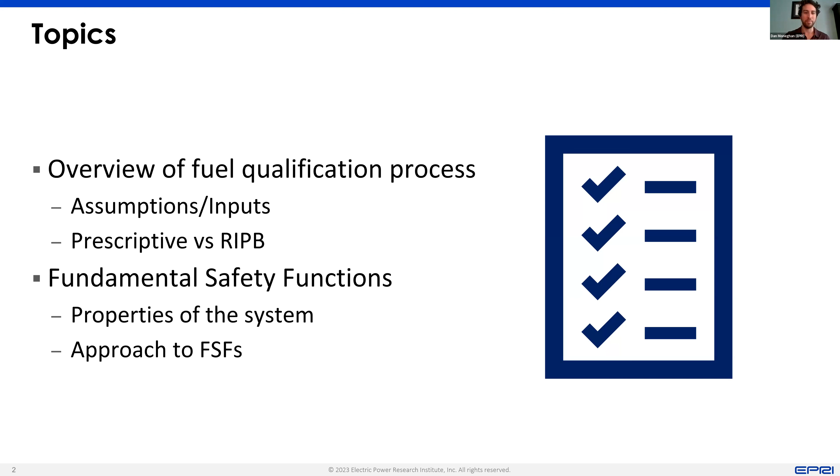So let's get started. The first thing I want to briefly touch on is what the fundamental safety functions are, because this is going to come up in a few different ways as we go through the fuel qualification process. Your fuel and the systems that it is involved with and entangled with are really going to have to do three things. They're going to have to limit the release of radiologic material to the public. The ultimate safety objective is to keep the public safe while we generate energy.

They have to remove heat from the reactor and wastes. We need to make sure that as we're operating these heat generating power plants, that we are adequately matching the heat generation and keeping any sort of accident from occurring that could release radiologic material.

And then we want to be able to control reactivity. And this is really just making sure we can adjust and modulate the heat generation term such that we can adequately remove heat, such that we can adequately limit the release of radiologic material. So these are all interrelated safety functions. And now let's jump into fuel qualification with these three goals in mind.

This is a graphic copied from NUREG-2246, which basically steps you through the different things that you need to consider and achieve in order to get to that very top left corner, G, fuel is qualified for use. We're not going to talk about everything in this, and I'm really only going to hit a few points at a high level. But for your reference, this is the figure that's going to be sort of in the background that we're stepping through. We're going to go from the right really to the left, because that's how you get from the data and modeling assumptions all the way to the point where you have a fuel that is considered acceptable for use in a reactor.

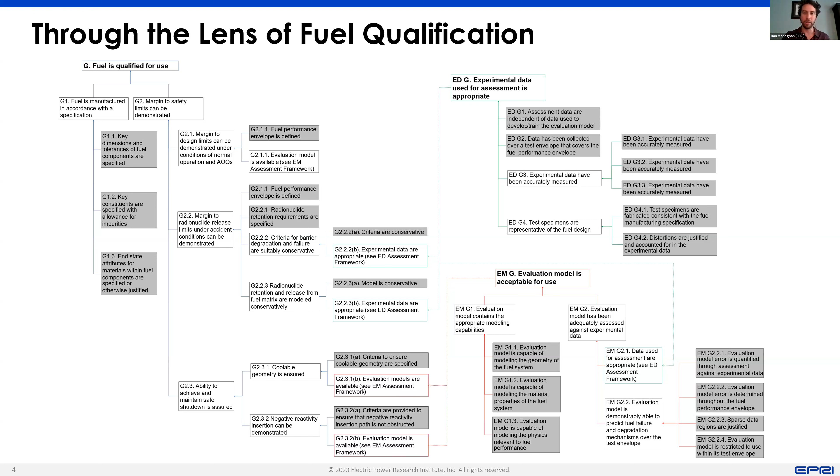So let's call those two out. The two assumptions that we're going to make in this discussion are about what the inputs to our process are. Now, in reality, there's a lot of work that's going to go into making sure that you are developing experiments that get you the data you need in the form you need with the uncertainties you want, of the pedigree you want. And there's a lot of ties between how you use that data to build a model that you then validate, because you're going to need both the data and the models to really be able to progress this process. We don't have time to go through every single possible experiment you could use to really develop all of this, and we're not going to try because that's not really where the value lies.

But one thing that I want to point out is what typical experiments are done. Oftentimes, when you're trying to qualify fuel, what you're really trying to do is show how the fuel changes throughout the operation of a reactor system. In general, this means that you would expose the fuel element to a sustained or semi-sustained level of heat or a specific temperature, generally the operating temperature of the reactor, and a certain amount of neutrons. You're going to put it in an environment that is representative of the irradiation conditions in the reactor so that you can see how the fuel changes.

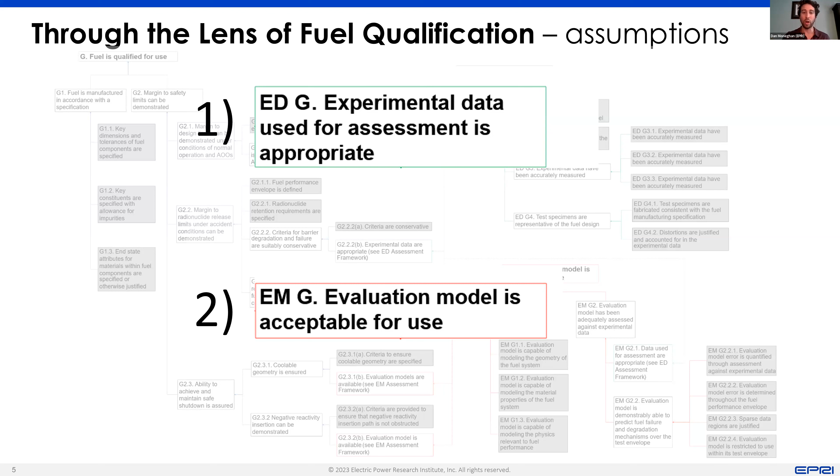But let's take those assumptions and walk through the process and see how a prescriptive versus a risk-informed performance-based approach may vary at different steps in this fuel qualification process. So starting from the data, we use that data to show that there are conservatively defined barrier degradation criteria and radionuclide retention. Now, these barriers can be any number of things.

They can be actual physical structures. They can be feedback control mechanisms. They can be systems or subsystems. There's a lot of different things that could be a barrier here. But for the most part, let's look at these from the perspective of solid barriers because, again, time constrained and we're simplifying a little bit here.

Now, if you think about the solid barriers that are going to exist, that are really trying to keep this system together, they can degrade a bunch of different ways. There are thermal stresses, there are corrosivity effects, there are erosivity effects, there are radiation impacts. Now, radionuclide retention works in a few different ways.

In a liquid-fueled system, many of those radionuclides are going to be soluble. They're going to be suspended or dissolved in that fluid. They'll be in entrained particles. They'll be sitting in this flow somewhere. But those aren't the only kinds of things we'll have. There's also, in addition to solid particulate fission products, fission product gases that evolve through operation.

And while there's a certain solubility level of these in most of these fluids, they can still eventually bubble out and come out of solution. So there's going to be some sort of a gas gap over top that's going to have a different profile of those radionuclides.

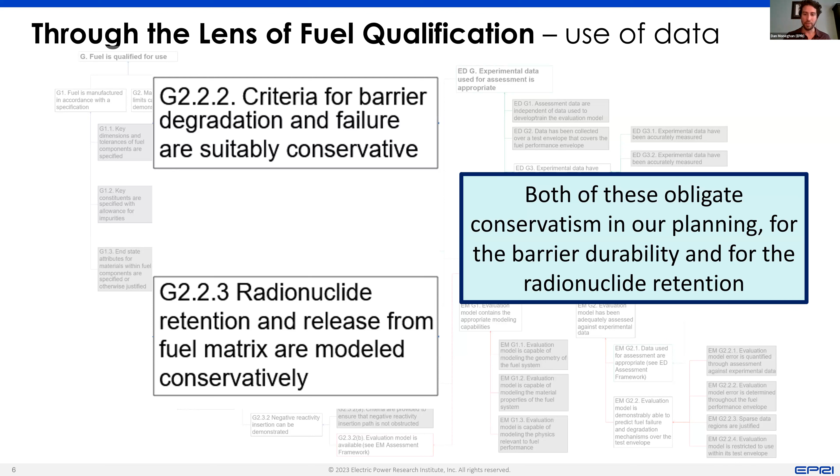That conservatism really trickles up into margin, because you need to define what the margin to your radionuclide release is under a variety of different accident sequences and conditions. And this is important to be able to get to that first of those fundamental safety functions. We need to protect the public. We need to limit the release of radionuclides.

As you're defining these barriers, again, if you do it prescriptively, that margin is going to be built in. That's going to sort of be defined based on whatever occurred in the data when the regulation was developed. If you do this in a risk-informed, performance-based way, well, there's even potentially some further benefits to just having sort of local conservatism and local margins. Because in a liquid-fueled system, an accident sequence can evolve that doesn't necessarily work in the same way as it would in a traditional nuclear reactor or a traditional solid-fueled system.

There are some quirks, as there are with every reactor design, to a liquid-fueled system. In the case of a liquid salt, for instance, there can be an overcooling accident sequence. If you get your temperatures down too much, or you remove too much heat, or something goes wrong, you can solidify your whole primary system. And that's not an accident sequence that is remotely achievable in, let's say, a pressurized water reactor. So the fact that you have these more flexible and sometimes quirky accident sequences that you want to consider means that the barriers that are impacted by these accident sequences may be different in different circumstances.

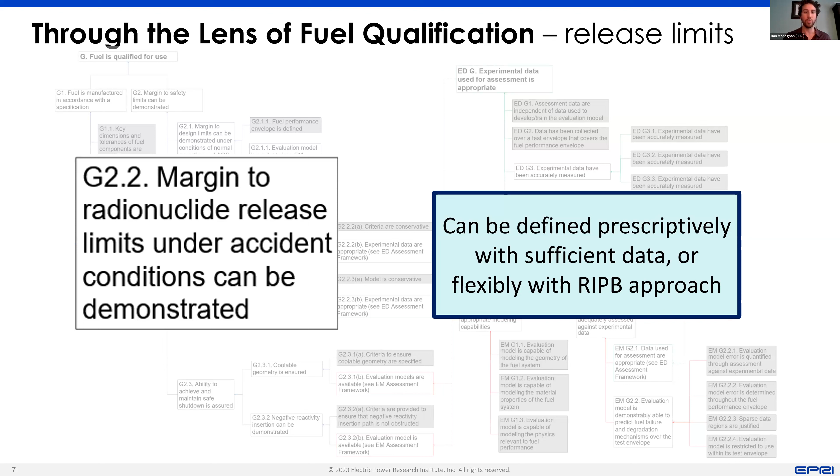So let's step back to another assumption. Let's go with our models this time. What is the model trying to do here? Well, the model needs to show that you can ensure a coolable geometry and that you can demonstrate the insertion of negative reactivity. Now, that first one is a bit questionable. How do we ensure coolable geometry in a fuel where the geometry is a sloshy Newtonian fluid? We pump it. Is having a pumpable fluid geometry? Are we ensuring the geometry that way? Well, I'm not sure. That kind of depends on who's listening to this discussion.

But what I could tell you is that for a liquid fuel, you can ensure that the heat generated by the fissioning and the decay of fission products is able to be extracted based on the characteristics of the primary system. So that we could do. So if we can't ensure coolable geometry necessarily based on the wording, but we can satisfy the objective that this is pointing to, which allows us to accomplish the fundamental safety function, maybe there isn't a great way to get through this particular step in fuel qualification with a liquid-fueled system. But on the other hand, there is a pretty convenient way, and not necessarily a complicated way, to show that you can do it in a risk-informed, performance-based way, satisfying the performance objectives of the fundamental safety functions.

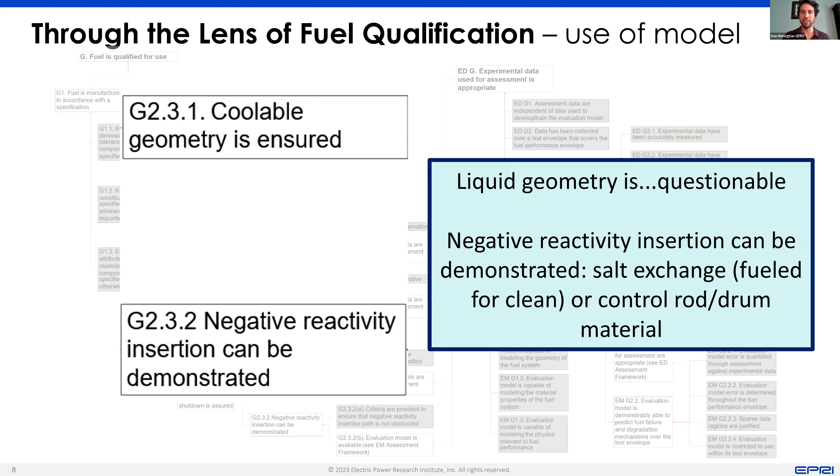Well, what you're trying to do is show that you have the ability to achieve and maintain safe shutdown. Prescriptively, this has a very precise definition. In a prescriptive approach, safe shutdown is when reactivity control systems must maintain a subcritical condition of the core, and residual heat systems must operate to maintain adequate cooling of the core. That's a safe shutdown, according to the NRC.

This is something that is very realistic and reasonable when you're looking at a light water reactor system. But it's a little more difficult and not necessarily the best working definition if we consider a liquid-fueled system. Let's take a molten salt system here, for instance. In a liquid-fueled molten salt reactor, you can have a safe shutdown configuration.

And in this case, safe shutdown is a configuration where there is no possibility of an excursion, really, where you would go to a point where any of the fundamental safety functions are stressed. So you're retaining radionuclides, you are cooling any decay heat or fission heat that exists, and you are showing that there is sufficient reactivity control. There can be configurations like that where there is not necessarily subcriticality maintained in getting to that configuration.

Because of some of the different temperature coefficients of the salt fuel, as you cool down and downpower your reactor, you can come through different criticality oscillations. You can tick back and forth between subcritical and critical, but at no point could you lose control of that system if you approach this correctly.

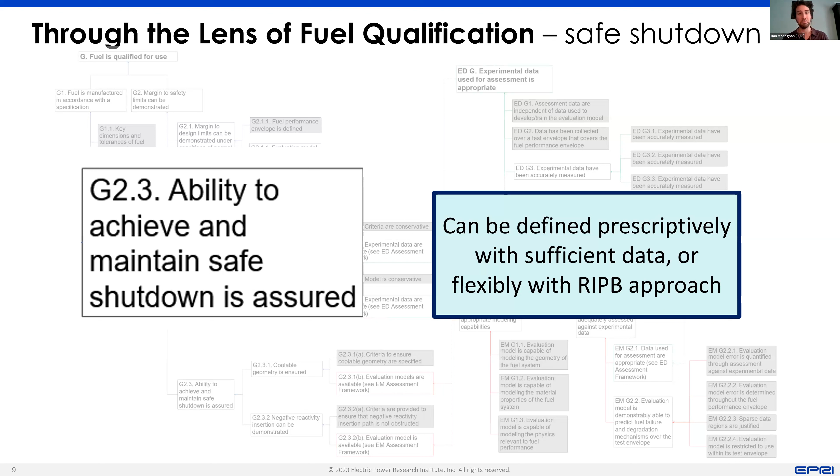So this seems like another possible place where prescriptively the liquid-fueled system, in this case specifically a salt system, can't necessarily satisfy the letter of the regulation. But in a risk-informed performance-based way, it probably can. So what does that lead us to? Well, that leads you to a choice.

You could potentially define all of this in a prescriptive or deterministic way, maybe requiring some rewrites like geometry or shutdown, but with enough data and with enough time to develop models, you could probably get to the point where this can be written prescriptively. If you do so, when that regulation is developed, it will be done with conservatism and margins based on the highest uncertainty level in the data used to populate all of the regulation.

So if the regulation is written in time for, let's say, the first reactor trying to go through this process, well, those margins might be pretty big. And that could be a large impact to your economic case if your margins are something that you're kind of concerned with, your economic margins in this case, not your safety margins.

In a risk-informed performance-based way, you don't necessarily need all of the same data you would require to develop it in a prescriptive way. You probably want that data because it gives you benefits for your operability and other things. But as long as you have enough to show what it is you're going to do to actually ensure that

you stay within a set envelope, what's going to matter then is the uncertainties that tie to a specific margin and what you can do with the operation of, let's say, that first of a kind system to shrink those uncertainties, to buy down your margin for your second unit.

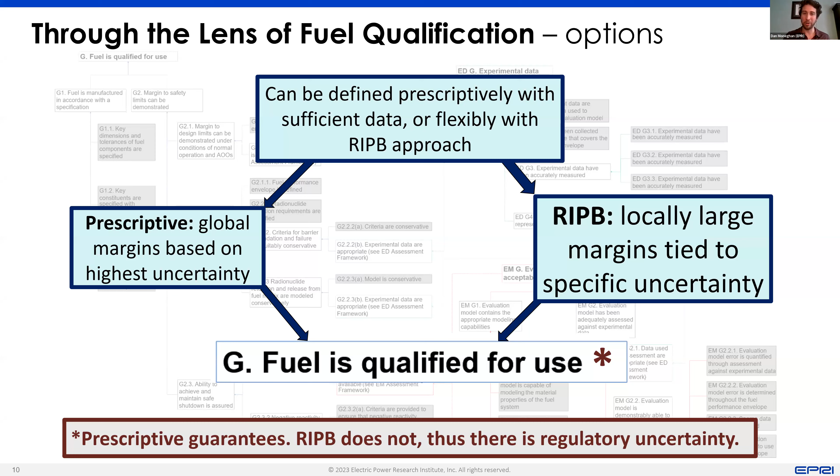Now, all of this was assuming a whole lot of things. Let's talk about some of those things we were assuming. I'm going to be working primarily off of NUREG/CR-7299. This is fuel qualification for molten salt reactors, which is sort of the culmination of a bunch of work that Holcomb, Poore, and Flanagan did through Oak Ridge National Lab for several years. But all of this is really tied together by the idea that characterizing the performance of your fuel is what matters the most, and that it's kind of complicated for these liquid fuel systems.

So to reiterate, what we're doing is ensuring that the fuel in our reactor and the systems that it interacts with are able to satisfy the objectives of the fundamental safety functions: limiting the release of radiologic material, removing heat from the reactor and wastes, and controlling reactivity. Again, these are all very coupled systems. You control reactivity so that you don't have to overly stress heat removal so that you can guarantee that your radiologic material release is within the acceptable limits, which are extremely low for anyone who's listening and not familiar, extremely low limits.

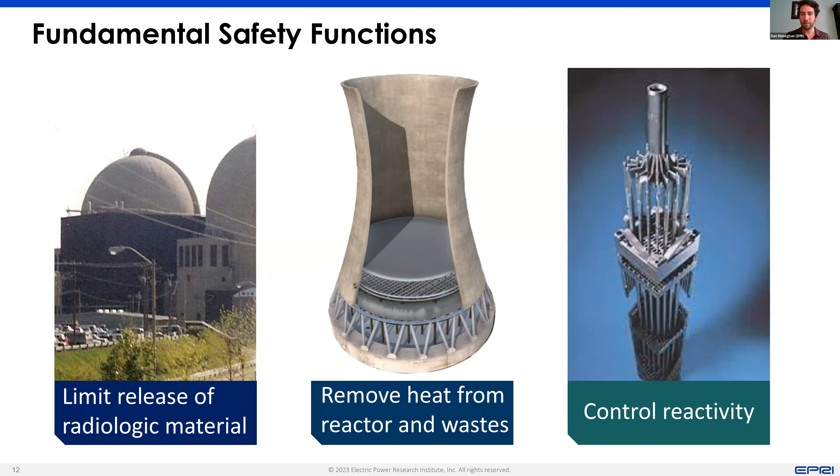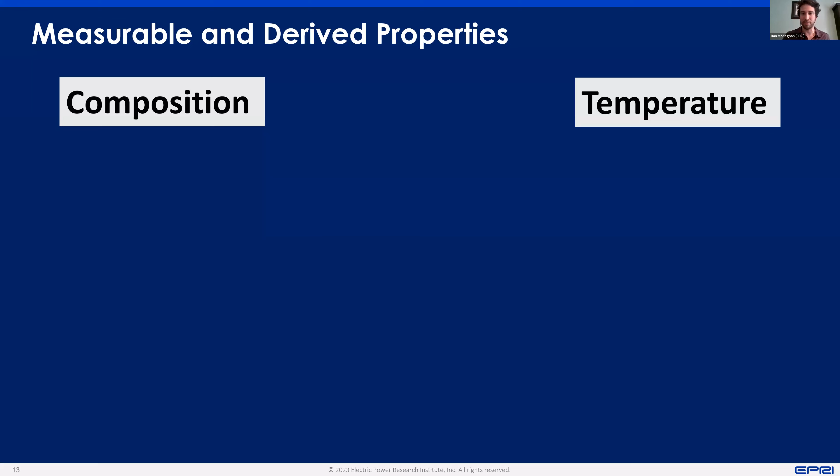So what do you actually need to be able to show this? At the end of the day, you can only measure but so many things. In the NUREG, Holcomb points out that, in theory, temperature and composition are the only two properties of a fuel salt that you necessarily need to know to be able to identify all of the other attributes that have direct impact on those fundamental safety functions.

Now, what maybe are those? Heat generation. Well, this one's important for obvious reasons. You need to know how much heat's coming out of your fuel so that you know how much heat you have to be able to extract. Great. I mean, there's also other contributions like fission products and such, but we'll get to that. Reactivity, that matters a lot. Your reactivity still comes down to what your composition is and then sort of some of the operating practices, but that all builds up to temperature.

Redox state, so you understand the chemistry, density, pressure, viscosity, and heat capacity, all this sort of gets to your ability to remove heat sufficiently. So a lot of these are all tied to those first two fundamental safety functions, but reactivity is obviously the third one on its own.

Now, what's difficult is that all of these have some complexities and interdependencies. Your reactivity directly influences your composition. If you have higher reactivity, you might be inducing more fissions, which means the generation rate of a statistical distribution of different materials is going to occur. So the time evolution of your composition depends on your reactivity.

The heat generation, well, this is dependent on the composition essentially directly, but the heat generation impacts your pressure, which will influence your viscosity. Your redox state also influences your viscosity because of the way your system properties are going to interact with different materials in there. The redox state also influences density because this is going to control which pieces of the composition end up present. The density is going to impact your heat capacity. If you have more or less density, it's going to change the way the system itself has sort of thermal inertia.

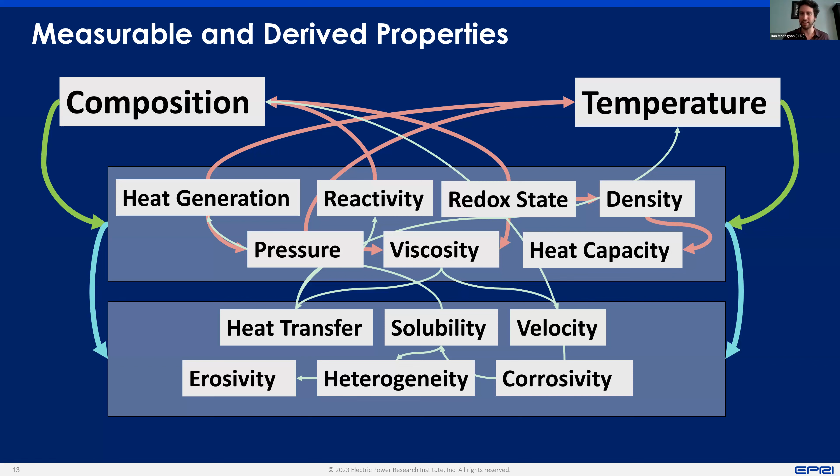So what we need to do is figure out a way in which we can not only define that performance envelope for the liquid fuel, the salt fuel, the metal fuel, whatever we have, but also develop a way of testing and sensing and detecting changes in the system that will tell us information we need to know on that essentially refresh rate that is going to let us verify with the precision we want that we are within the confines of that performance envelope, which, now that I put it that way, is maybe a bit more complicated than just the fact that variables have interdependencies. So how do we accomplish this? Well,

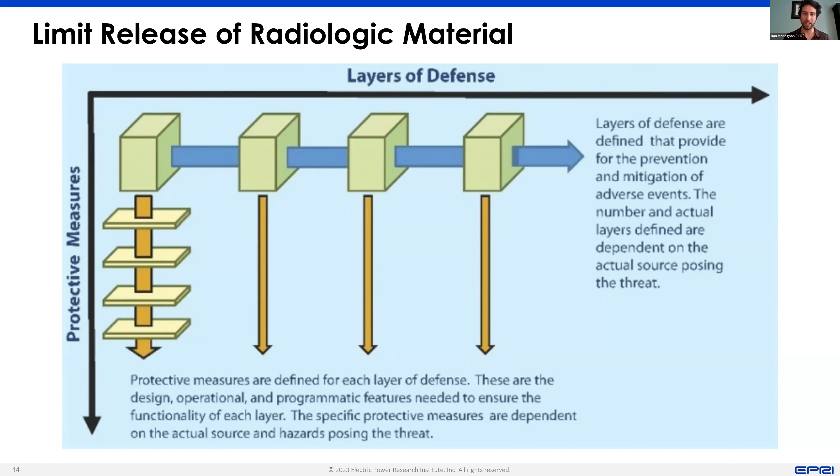For limiting the release of radiologic material, that first fundamental safety function, you'd probably look at using something like a defense-in-depth approach. And there's a handful of places that have defined this: defense layers, defense lines. There's a lot of different terminology that goes into it. But the point is, a series of barriers, semi-permeable or impermeable, are going to be required to show that if radionuclides start to emerge, they get stopped, stalled, slowed enough that by the time you get to that final barrier, whatever it happens to be, a feedback mechanism, a system, a subsystem, a piece of metal, there is no radionuclide escaping to the public exceeding your release limits within the margin you've defined.

Now, for most of this, I'm just going to start talking about salt systems because we have a little bit better information through the molten salt reactor experiment on dissolved fuel and salts as opposed to metals. It all probably applies to metals too, just with different numbers and different solubilities. Point being, well, your liquid fuel is actually the first barrier you have. Your fuel salt is soluble to the fission products. It is implicitly chemically bound to the fissile and fissionable elements, and that's pretty good already.

So if this is our first, let's call it a semi-permeable barrier, because as we just pointed out, things can change. Your fission product gases, well, they can bubble up to the top into the cover gas, or they can just be retained as bubbles within the fluid. But there's also going to be those solid ones. These might deposit out through thermal temperature difference-driven corrosion. They'll deposit into the cold leg. That's going to change where your radiologic material ends up being. So knowing where they are and knowing how they function is going to matter for which barriers matter, depending on the accident sequence you're considering.

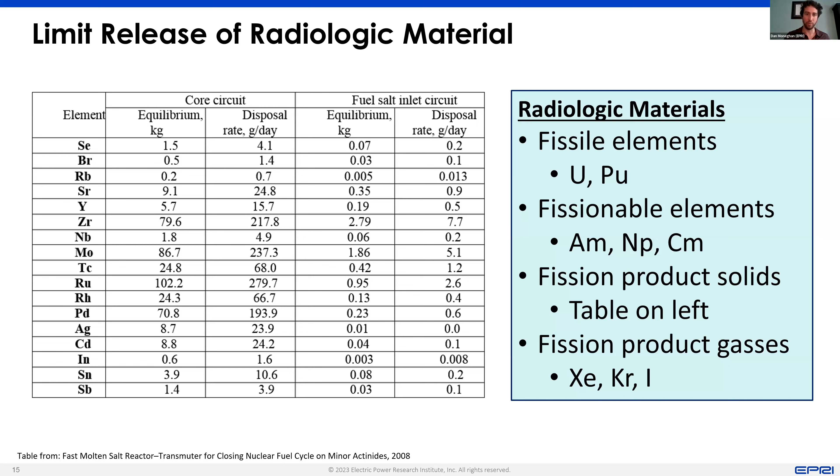But in general, well, that's kind of approachable. We can measure a lot of this stuff, and even if we can't have precise knowledge of every single piece of it, we can get a pretty good understanding of where these different phases move throughout the operation of your reactor. So what's the next one? Well, you need to remove your heat from both the reactor as well as the wastes.

What are the heat sources then? Primarily, you have the fission of uranium and plutonium. In a fast spectrum system, you'll also have the fission of americium, neptunium, curium, or all of the fissionable elements or isotopes will eventually get fissioned through whatever decay sequence gets them into a fissionable or fissile state. You also have some secondary heat generation contributors. These are primarily your gaseous fission products and whatever plated out, fallen out, deposited solid fission products you have.

That means that heat generation through the core, well, it's going to move generally in a couple of directions. The first big way of removing heat from the core is, again, going to be that liquid fuel, that fuel salt in this case, because it's the primary heat transfer medium. It's going to fission in your active core region, and then it's going to flow over to a heat exchanger where it's going to dump as much heat as it can into your secondary before it carries into the tertiary, whatever your power conversion is. But that's only the primary way of removing the heat.

There's also going to be heat generated in your cover gas. So you're going to need some sort of way of managing the heat in that cover gas, a decay heat rejection system, for instance. But this is also going to be something you want to do because you're probably going to want to be pumping out and extracting that cover gas, cleaning it up, making sure it stays inert and isn't super heat generating. You're also going to have some way of removing some heat from the structural material, or from the piping material, because you're going to have fission products that may end up physically on those pipes, and that's going to be generating heat.

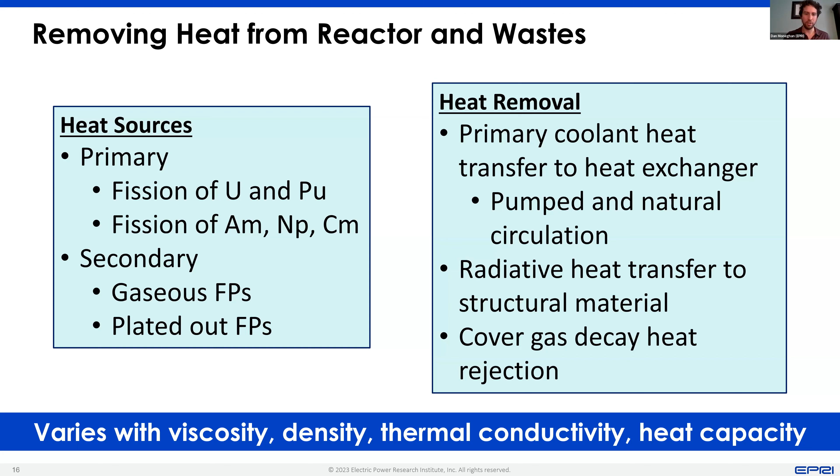But overall, well, that also seems pretty attainable. It's adding a couple of systems that may need some maturing, but we've got a pretty good idea of how to do most of that. And that brings us to the third one, which is really controlling reactivity. Well, how do we do that?

Controlling neutrons can be done in three ways. You can induce fission in something, and that gets rid of a neutron, not necessarily in a way that's going to remove neutrons, though; it adds neutrons. Okay, well, what else? In the case of a thermal spectrum reactor, I guess you can moderate neutrons. That's control, slow them down. Graphites, sometimes the fluid itself can act as a moderator, or some other kind of moderating material. Sodium hydroxide, for instance, is one that's been pitched.

But you can also absorb the neutrons, and that's really a way of getting them out of there. There are elements that can be in the liquid fuel that could also function as neutron absorbers. Plus, you could put in some burnable poisons if you wanted, I guess. So what are the reactivity control mechanisms we have access to? Well, you can just adjust the fuel liquid volume. If you bleed off some of your fissile material and you inject some clean material, you've reduced the reactivity, you've reduced the worth of that system.

You can adjust the heat input or removal. Well, because of how strong the temperature coefficient of reactivity of these fuel salts is, specifically strongly negative, which is what we want, by increasing the temperature, you can drive down the reactivity. Now, this is where that safe shutdown thing comes in, because if you lower the temperature and bring it down to a solid state, you're actually increasing the reactivity. But that's why you also have options like a control rod or a drum, a typical neutron-absorbing boron-based material, so that you can mitigate some of these changes.

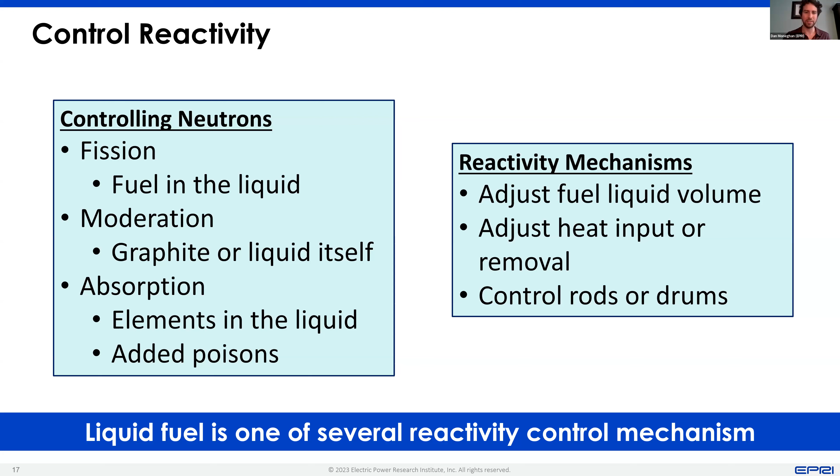So can we reasonably control reactivity? Well, yeah, that actually seems like the easiest one out of all three of these to satisfy. So where does that leave us? Well, a risk-informed, performance-based approach to the performance characterization of a liquid-fueled system seems like a pretty good near-term pathway if you want to get liquid fuel onto the market, if you want to get it into demonstration, if you want to be able to start collecting some of the data that can be used to improve the process.

Further data is needed if you want to develop right-sized margins, because right now we have enough data to justify probably pretty conservative margins. But ideally, you want to be getting those margins as right-sized as possible to improve your economics. Also, if you really want to develop that deterministic approach, you could totally do that. It'd probably take some rulemaking or some changes, and it would probably take more data. But you could do it.

And third, well, we probably need some improvements to modeling so that we can reflect the tight coupling of a lot of those properties in liquid fuels. And in this case, molten salt properties are one where we've seen a lot of work from the national labs over the years to try and identify some of these. But the more we can start to build out either a fundamentals model from temperature and composition that everything evolves from, or even just a kind of gross 12-dimensional matrix across all of those many parameters I discussed, so that you can say, if I'm here, here, and here, well, I can narrow down my region, and that gives me the bounds in the envelope.

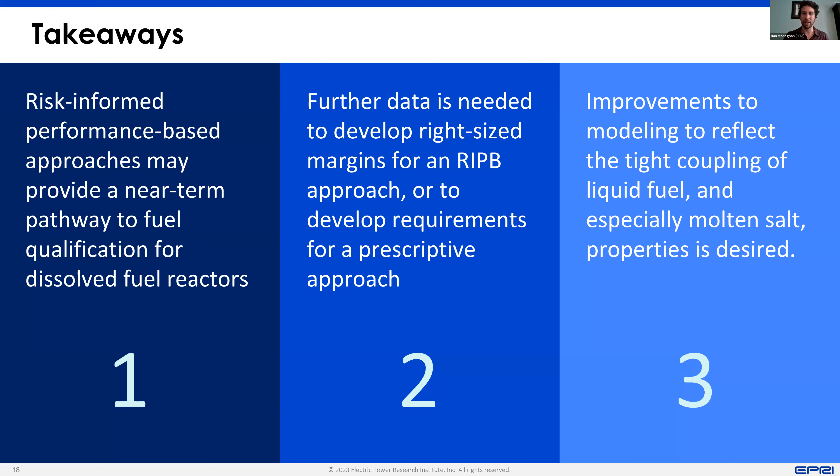Now, this is the end of my presentation, and I am going to jump straight into questions. We have one from Brian Grimes, who's asking about differences in interaction in fast versus thermal neutron spectrum.

So for those of you who are less familiar with some of the distinctions here, when a neutron's born from fission, it's born at ballpark 2 mega electron volts. And if that unit doesn't mean anything to you, that's fine, it doesn't need to. When you operate a light water reactor today, you can only do that with thermal neutrons, which is a neutron slowed down, in this case by light water, H2O, to 0.025 electron volts, which again, arbitrary unit, doesn't really mean anything here. Point being, you need to reduce the speed of that neutron by many orders of magnitude so that it is highly probable to induce a fission in uranium-235.

Now, when you consider what you could do with a fast neutron, a neutron at the speed it's born, you can induce a whole lot more interesting interactions with some of the non-fissile elements in your fuel. If you recall, light water reactor fuel is enriched to about 5% uranium-235. The bulk of it is uranium-238, not fissile, but it is fissionable. With a fast neutron, you can essentially convert the U-238 into a material that will fission.

So your probability of those fissions goes down, but the energetics of those fissions go up, and the amount of material you have in your fuel that can be fissioned also goes up. So you'll have more of these fission interactions. You'll also have some more different neutron capture interactions that will occur. So this is where you can kind of flex the properties of your system, and you can start to burn more of the americium, neptunium, curium, a lot of these different transuranic isotopes.